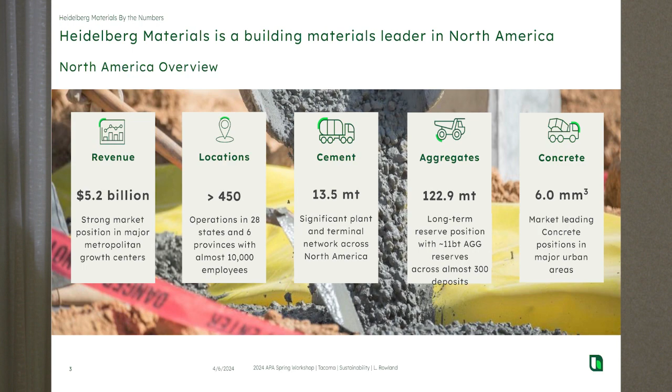Heidelberg Materials used to have a piece of Lehigh white cement. The only Lehigh cement in the country now is owned by an Italian company named Cementir, not associated with Heidelberg Materials, not associated with me. That's a completely different company. Heidelberg converted 140 brands to the Heidelberg Materials name here in 2023. So in the Northwest here, it was Cadman and Ocean Cement—that's all Heidelberg Materials now, et cetera. So we're a big company, big in aggregate, big in cement, pretty much solving heavy building material problems. That's what we do. And we're also fairly good size in concrete, ready-mix concrete as well.

So let me re-push that button. So concrete, the reason why it's important to know all that is that concrete is a huge material as far as the world goes. We are the number one building material globally, and more than 50% of everything we make in this world is concrete. Next to bagpipes, it is like number one.

I love bagpipes. That's so cool. So, in any case, yeah, exactly. Let's crank up the bagpipes a little bit.

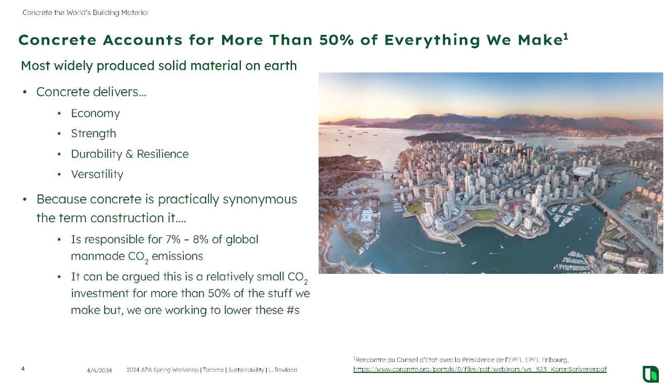So concrete, even though it's more than 50% of everything we make, has a carbon footprint of 7 or 8% of the world's greenhouse gases. Now comparatively, that's small, but it's still a big number because greenhouse gases are a big deal. So we want to improve on that.

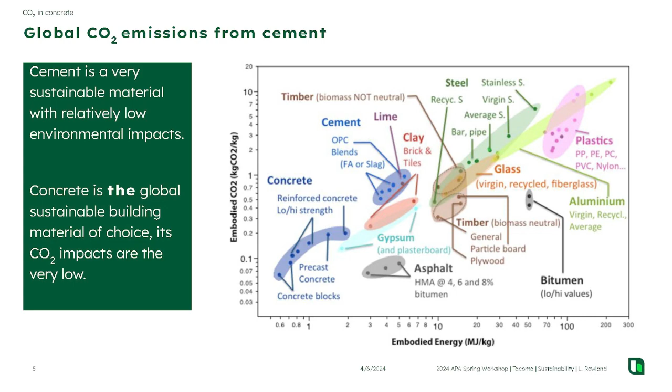Very high carbon, very high energy to produce those materials. If I want to make concrete, I go out in a quarry, I pick up stone, I clean it off and make sure it's the right gradation. I combine it with some cement and I've got concrete. If I want to make carpet, I go to Saudi Arabia and I get some oil, and then I refine and refine and refine that product to eventually get to something I can use to make plastic, and then eventually that becomes carpet, right? So just think about the processing of a material. That tends to be a good rule of thumb of how sustainable a product is.

So I touched on timber already. We're in timber country. Up the road here is the Tacoma Dome—at one time it was the world's largest wooden roof structure. I saw Sting there with Police back in '83. That shows you how old I am, right? So timber's not going to replace concrete. If you wanted to replace concrete with timber, just 25% of that market, you would have to have a forest 1.5 times the size of the nation of India. And then you would have to harvest that, and then you would have to plant a new forest, and oh, by the way, you have to wait 30 years to harvest the tree again, right? So there's no real good alternative.

So the key is to make our products more efficient, more effective, less carbon intensive. When we talk about carbon intensity, how sustainable a product is, it is evaluated essentially as an accounting exercise. We count up all the impacts associated with the material, all the impacts associated with getting that material from the quarry. That's our A1 right here. A1 is over on the far left—that's our raw material extraction.

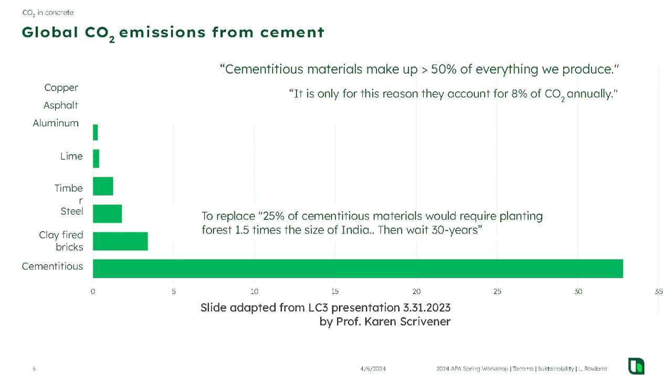So 2,800 degrees is my target temperature. When I get up to those temperatures, I am releasing CO2. Calcium carbonate, which is limestone, is CaCO3. We grab the calcium, that combines with our silica, making up new compounds that are reactive when you grind them up. When they become cement clinker, we grind that up to become cement. The CO2 is released - anytime you get above about 1,400 degrees Fahrenheit, you're releasing the CO2. It calcines right out. So that calcination of the limestone is a big piece of our emissions.

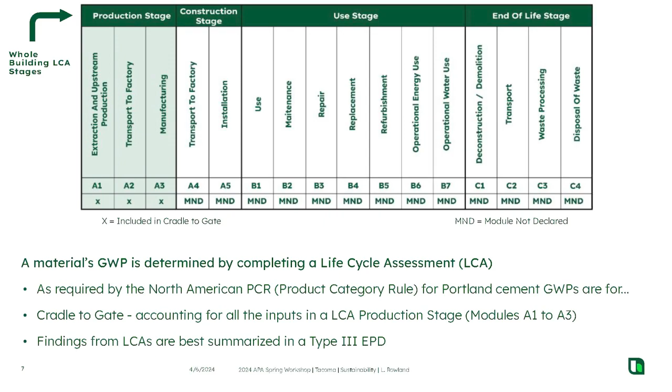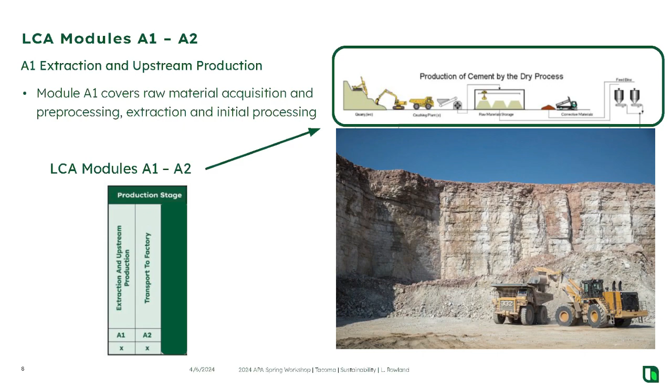For cement, it's my A3 - that's my big impact, in my manufacturing process. I take those raw materials, I grind them up in my raw mill, and then I put them through the kiln. About 25% of my emissions are the fuels I burn, because I have to raise those temperatures up to 2,800 degrees or so. And then the CO2 that's released from the calcination of the limestone, in this case for this specific cement, is about 63%. It's about 2/3, is what we say - 60 to 70% of all the CO2 emitted from the cement comes from that chemical process.

Then finally, I take that clinker, I cool it, I grind it up real fine to make cement out of it, and I store it. That's my cradle to my gate. My gate for cement is in the silo, ready to put in your truck to ship to you.

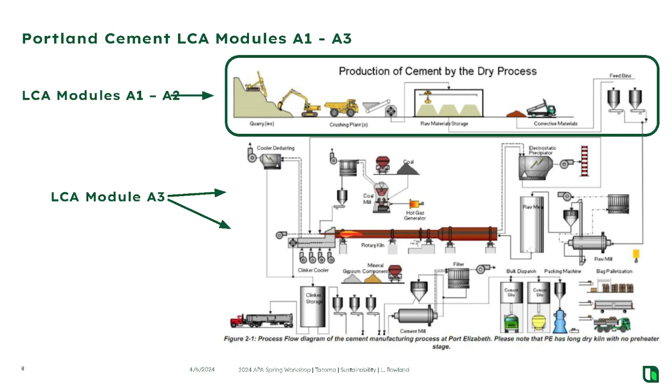So that's why I need to improve my act and get better at reducing my CO2. I'll go through this in a little bit more detail later, but basically, you've got your transport from the quarry to your precast plant, bringing in the raw materials. That's about 7%, and then 15% is everything else.

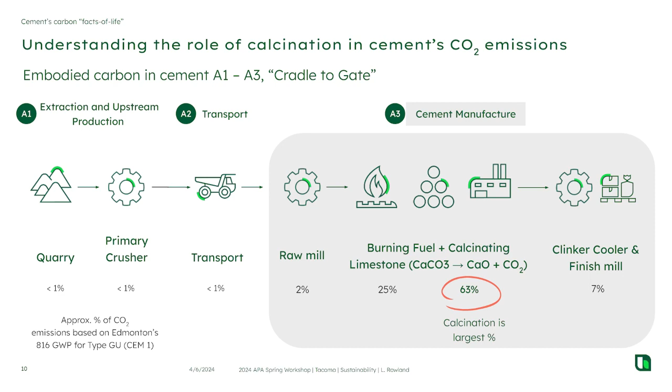As an industry, we recognize that we have this carbon footprint. We recognize that we have this impression out in the public that we're the bad guys because we have CO2 associated with our cement. So what we've done is we've worked real hard at generating a roadmap or a plan so that we can reduce our carbon footprint. We worked with the Portland Cement Association and the Global Cement and Concrete Association, the GCCA, and we have come up with these different approaches.

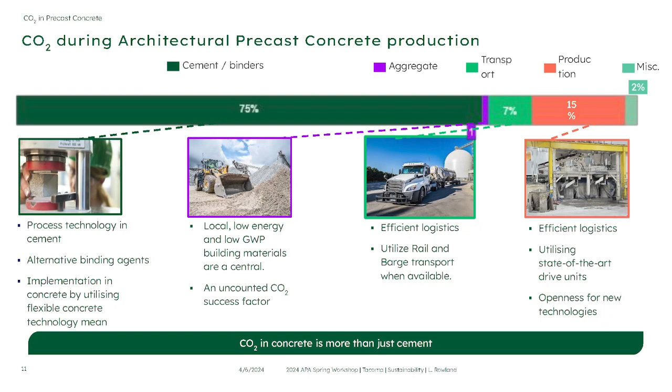And essentially what we're doing is we're focusing on the clinker. We're reducing the amount of energy, that 25% which is my fuel use, that CO2 associated with that. I need to get better at burning fuel, need to get better at burning alternative fuels that aren't like fossil fuels. Instead of burning coal or pet coke or one of these other materials, if I burn, for instance, municipal waste, which is going to rot and otherwise emit CO2, then I'm actually keeping that CO2 from getting released when I'm burning it, believe it or not.

And then the other thing that we can do is we're going to reduce the amount of clinker in our cements. We talked about Portland limestone cements - great first step.

If you're buying federal white cement, guess what? You're using PLC. It's very much like the type 1 you had before. It's got up to 10% more limestone in it than standard Portland, and we're helping reduce our CO2 that way. We've reduced our clinker content, we reduce our CO2.

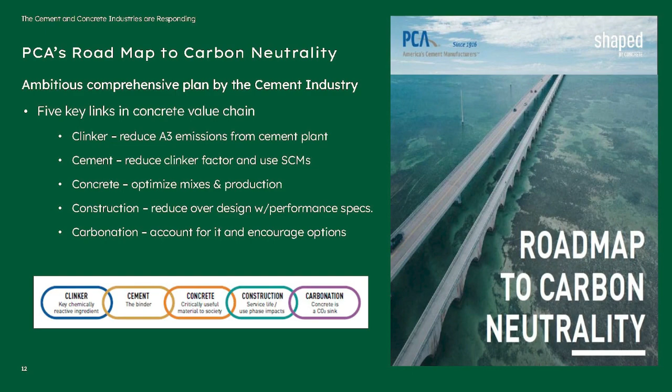And then, of course, we want to optimize our concrete. We want to get very good at that. And then we want to make sure that we design properly. And then the last thing we want to do is account for carbonation. I'll touch on this more.

So as an industry, we've responded. And as Heidelberg Materials, we're responding as well. Companies like ourselves have really worked hard at achieving these goals, getting better at making our clinker and getting better at making cements with alternative materials.

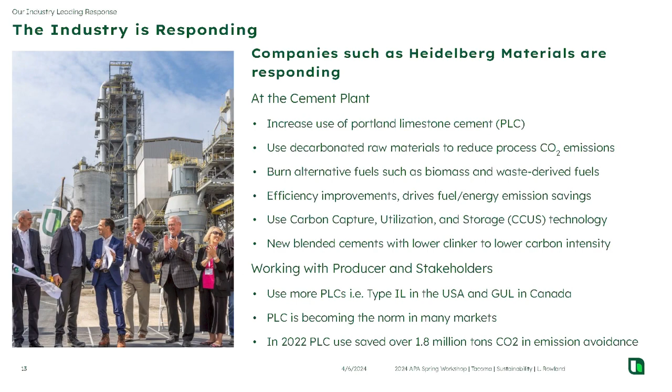So, like we say, we want to be the leader in this. I'm really pretty excited about being back with Heidelberg Materials because it was something that we always did. You guys know me for a long time. This has been a passion of mine, but Heidelberg Materials has really made it central to our business. It is no longer another thing we do. It is central to our business.

So we're basically a tiger trying to change our stripes. We're no longer just a cement company. We're a materials company. And we've set some very ambitious goals.

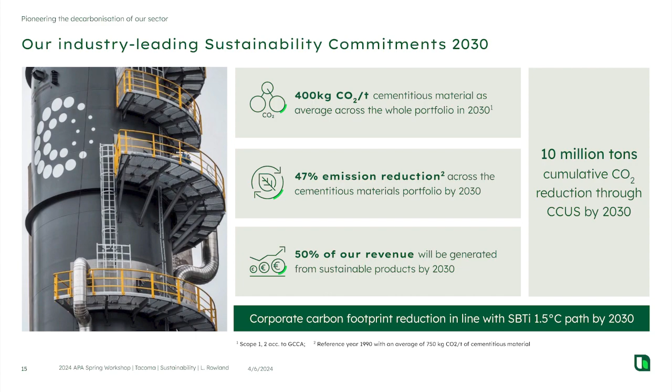One of these goals is to reduce our cementitious materials down so that we are only producing 400 kilograms of CO2 per ton of cementitious material. Don't get hung up on metric versus imperial units. Pound for pound, standard Portland cement has about 0.9 pounds of CO2 associated with every pound of cement. We're trying to get that down to 0.4. So 400 kg per metric ton, 1,000 kg, simple math. That's why I like to keep it in metric. All right, so that's a big ambitious goal.

The other thing we're doing is we're going to produce about 50% of everything that we do as a low carbon material. And this is by 2030. So these goals are very ambitious and they're coming up quick. About 6 years, this is all going to get done for us to declare victory and be able to put this behind us and say we've done it.

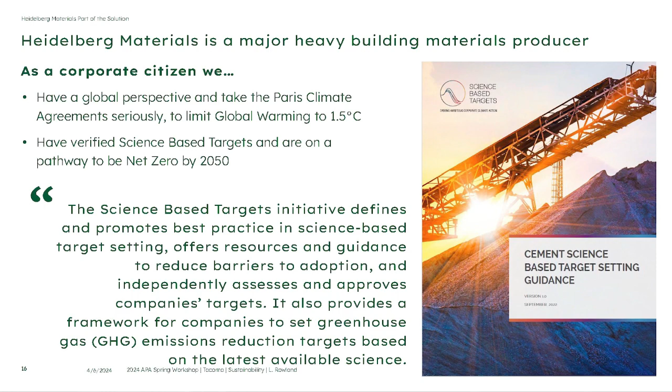The other thing we're going to do is we're embracing carbon capture, utilization, and storage. I'll tell you about that a little bit more in detail, but essentially what that is doing is we're capturing that CO2 that we release from burning our fuels and calcining our limestone out of the stack. And instead of letting it go out into the atmosphere, we're capturing it, we're compressing it, and we're pumping it down in the ground for permanent storage.

These goals and these plans have been certified by the Science Based Target Initiative. There's no agency out there that can say that you've got a good plan other than this SBTI. And this group, as you know, formed a specialty group that understands cement, and they've gotten together and said, yep, Heidelberg, if you guys do what you say, you're going to get to your goals.

So by 2050, we anticipate being net zero. So even though we're manufacturing cement and cement binder type materials, our emissions are going to be zero.

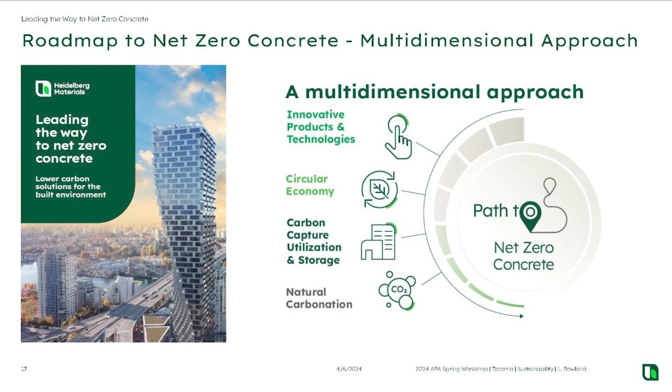The way we're going to do this is we're going to embrace innovative materials. We're going to embrace the circular economy. Think about recycled materials, fly ash, slag, recycled concrete. Concrete is the material that keeps on giving. It shouldn't go to the landfill. It should get crushed up and used as aggregate. You can use it back in and form new concrete with it.

So then we talked about carbon capture, utilization, and storage. And then we want to get credit for the natural carbonation that is happening with all concrete anyway. So we talked about measuring, we talked about accounting.

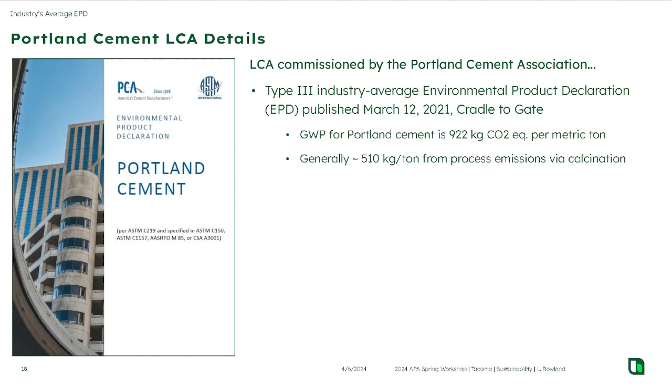And one of the big tools that we have in doing that is an environmental product declaration. EPDs - there's an industry-wide EPD for cement, which we took part in, published by the PCA. And this one right here is cradle to gate, and this is where I got that number from: 922 kg of CO2 per ton of Portland cement. That's an industry average.

And over 500 kg of that is from that calcination, from that process emission associated with decarbonating the limestone. We talked about our whole building life cycle. Once again, just to be very clear, we're talking about this piece right here, the production stage of making that cement. That's what A1 through A3 is, and that's where that 900 number comes from.

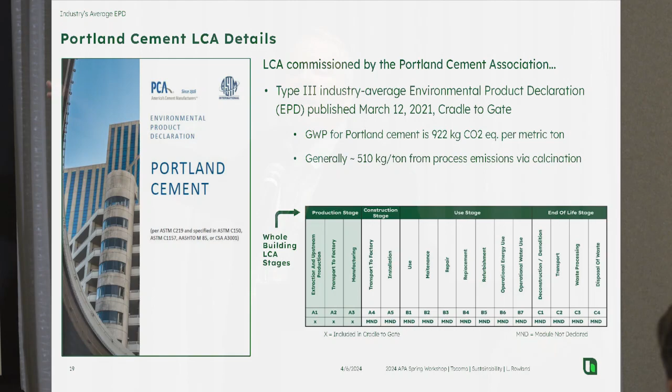So where the rubber meets the road on this is when you start accounting for this, you start counting it up. So according to the EPD for architectural precast, they say that they've got this much cement in a typical ton of precast. And precast is a little bit unique. Instead of doing a square meter or a square foot or a cubic yard, they decided that they wanted to use a unit of a ton of precast material, which of course includes the rebar, which includes everything else that's in that precast concrete. In that, their mix calls for 143 kg.

If you need to do the math, it's 2.2 pounds per kg, right? And they also said there's going to be a little Portland limestone cement in there. I'll talk about that later. But what happens is all of these add up. You multiply it out by your global warming potential. Remember, I told you it was 922. I multiply that out, and I come up with my total CO2 content or my global warming potential for that mix, right?

So how am I going to reduce that? I'm going to reduce that by being more energy efficient. I'm going to reduce that by utilizing alternative fuels. I'm going to reduce that by converting to Portland limestone cements and using blended cements, which reduce my clinker content. I'm going to do that by embracing supplementary cementitious materials. Remember, I said I want to get to 400 kg of CO2 associated with all the binders I sell. Well, guess what? I'm selling fly ash, I'm selling slag, I'm selling alternative binders, which have very low CO2 associated with them. That's helping me reach my goal, right? And then, of course, we want to utilize good design.

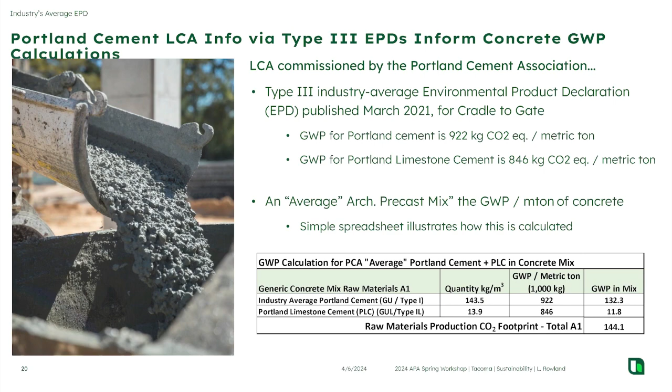So, in a nutshell, when you start talking about cements, I've already talked about this a little bit before, but the clinker content is the key to how much CO2 you're going to have in your cement. Ordinary Portland cement with that big number, that 900 number, is that high because it has almost 95% clinker. That's the traditional Portland cement, which we all grew up using, right? So about 95% of that cement is clinker, 94, 95%. Portland limestone cement, I've dropped that down about 10, 12%, right? So my clinker content goes down, my global warming potential for that cement goes down.

If I'm going to utilize a blended cement like they have right up the road here in Bellingham, we've developed a type IT, which means it's a ternary blend, which means it has more than two things in it, right? I've got clinker, I've got an SCM, in this case it happens to be a fly ash, and then I've got some limestone in there. That has a much lower clinker content. It has a very low carbon footprint associated with it, right? So that's the current technology. These are the things that we can do with cement currently to help us reduce it.

I talked a little bit about SCMs. Heidelberg Materials this year will become the largest producer and seller of slag cement in North America. We're working with slag producers. We're putting in granulators, which is a key component to make slag reactive. And we're helping them develop those facilities. So we're going to be a huge slag supplier here in North America.

Slag's a really great SCM because you can have very high replacements with slag. Fly ash, people start about 15, 20%. Slag, people start about 30 to 40% replacements, much higher replacement percentages with slag than you get with fly ash. An air-cooled slag doesn't do you any good. It's essentially a stone. It's not very reactive. When you quench it and you granulate it and you turn it into slag cement, it becomes very reactive. It's a very good SCM.

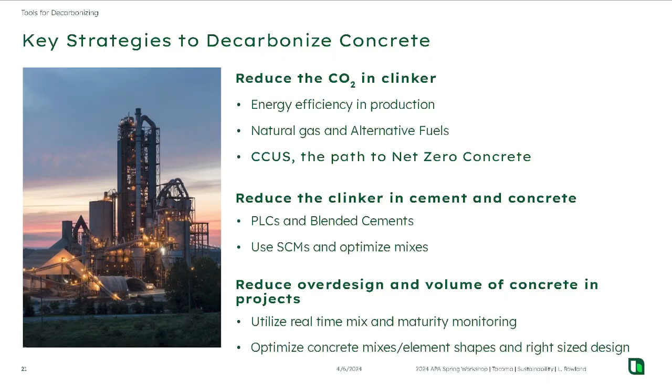Yes, sir. So, two questions. One, in terms of the SCMs and their whiteness and consistency, what would be your top choices? And then number two, are there any limitations in the amount that you can supplant with the PLCs versus the traditional Portland cement? So Nick's talking about consistency of color, and he's talking about limitations, right, for the SCMs.

With the PLC, which already has them. Yeah, there's no reduction in the amount of SCMs that you can use because you're using a PLC instead of a traditional Portland cement.

You actually get a better bump out of your early strengths with slag using a PLC than you do with ordinary Portland cement, because the limestone within there is ground superfine and it reacts with the alumina in the slag. So if you were to side by side replace, say, 40% slag in a Portland cement mix and a Portland limestone cement mix, you'll get higher early strengths from the Portland limestone cement mix with that slag. Pretty much across the board that happens.

As far as color consistency, slag cements tend to be very consistent, very good light colors. Metakaolin tends to be very consistent. It can have a bit of a tint to it, a bit of a pinkish hue a lot of times, because when they calcine it and heat it up, that tends to happen. Some of the pumices, Brian was here before, remember, he was with one of those pumice companies, they tend to be pretty good. But I would say that as far as color consistency, the slag and metakaolin for the light colored SCMs are probably the two.

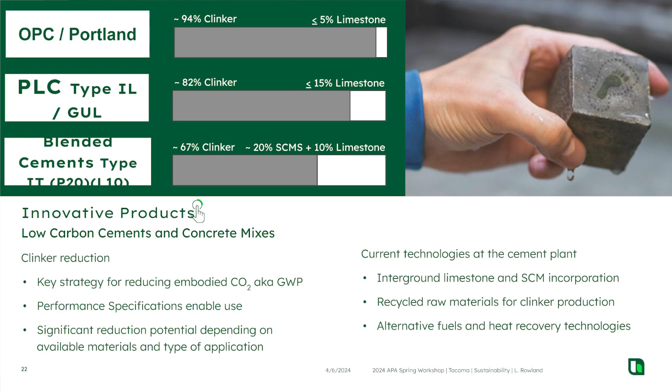So it's the same process as efflorescence. The difference is, instead of getting a very intense deposit of that material in a place where there was a capillary, which forms efflorescence, this is throughout the entire matrix. And you don't see any color change. It will tend to whiten it up a little bit, lighten it out a little bit. But you don't get that efflorescence stain.

So we're going to sequester about 400,000 tons a year there. That will start, it's going to be active this year, the end of this year in 2024, and it'll be actually producing essentially net zero cement in 2025. What are you going to do with the CO2? I'm going to pump it down into the ground and it's going to stay there forever. That's what I do with it, and I'll go into that a little bit more.

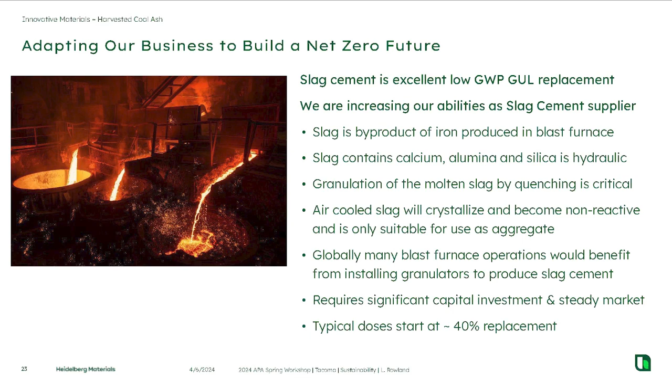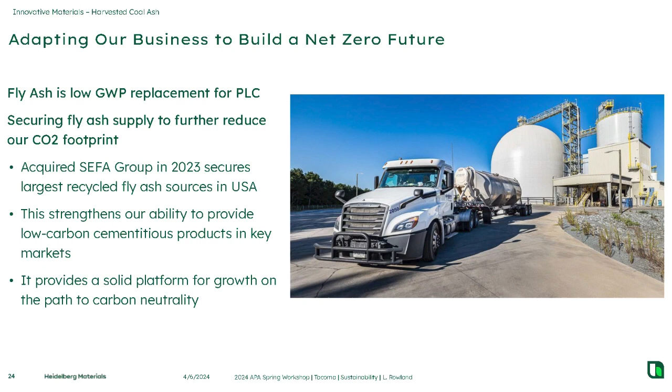The one in Edmonton, Canada is going to be able to service this market. We've already figured out that we're going to be able to sell net zero cement into Tacoma, into Puyallup, into Seattle, into the greater Northwest that will come out of Edmonton. And even with that transport distance, which is very great, we're going to do it on rail, so you're still going to have a very, very low CO2 associated with this.

So with this plant, it'll be a full 1 million tons. It'll be the entire process emissions that come out, all the emissions that come from the plant will be captured, compressed, injected in the ground. The reason we can do this in Edmonton is we have the right kind of geology. Can't do it in Florida, can't do it in a lot of parts of the country. You have to have exactly the right kind of geology. So when you pump it in the ground, it stays there.

Okay, so let me get away from cement and talk a lot more about precast. And all that is to set up the point of saying, when you guys are doing your precast, when we're looking up at that beautiful thing, how do we account for it? Well, the PCI has issued an industry-wide EPD, Environmental Product Declaration, for architectural precast. I'm going to use that as the example.

So the EPD is based around a metric ton of precast. So you think about your precast panel, a metric ton, how many cubic yards does that work out to? About a half a yard, maybe 0.4, 0.42, something like that. Cubic yards of concrete is about a metric ton. It's going to include all the reinforcing, all the attachments, all the anchors - all of that material is included in that metric ton. That was the declared unit. I was not on that committee, I did not get a vote, because I would have done it in square meter or square foot or cubic yard. But this is what they've done.

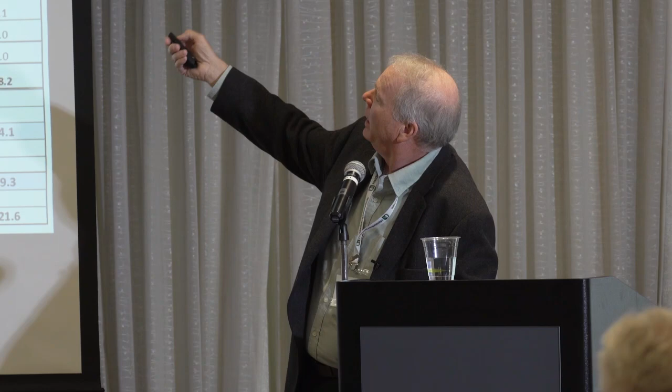I'm going to use 40% slag replacement, which is very typical. I'm not going to use any ash, I have 0 pounds of ash in there. I'm going to add those up and I'm going to get a 37%. Simple math, folks. This is what it's all about. This is the power of an EPD. This is the power of changing up your cements. Remember, we're at 75%, that's a big one.

Now, if I utilize carbon capture, utilization, and storage, that really changes things. The cement is no longer the big boogeyman in the room. The CO2 goes down to almost nothing, and now it's a very small piece. And then we really can kick wood's ass because we're going to have CO2 much less than that.

So the other thing that's important is that specifiers, stakeholders, owners, everybody gets on board and understands this as well. We want to maximize our benefits by utilizing good design. And what's really neat about the precast industry is they typically come to you and say, I need a panel that does this. The ready-mix guys, they're told how many pounds of cement to use, they're told what the water-cement ratio should be and all this stuff, and it tends to be a lot of over-design.

Our over-design comes from having to strip early and having to get that out of the form. So we want to minimize that and be as efficient as we can with our concrete and make sure that we utilize, essentially, as much as we can, recycled materials, etc.

So UHPC, the way it becomes very sustainable is just like Anthony said, we're reducing our elements, we're reducing the amount of concrete that we make and use. Even though that concrete, because it has a very high SCM content, has a very high binder content, has a higher global warming potential pound for pound, you're using a lot less pounds. Like Gary was saying, you can reduce your weight dramatically. And when you do that, the overall effect is you're lowering your CO2.